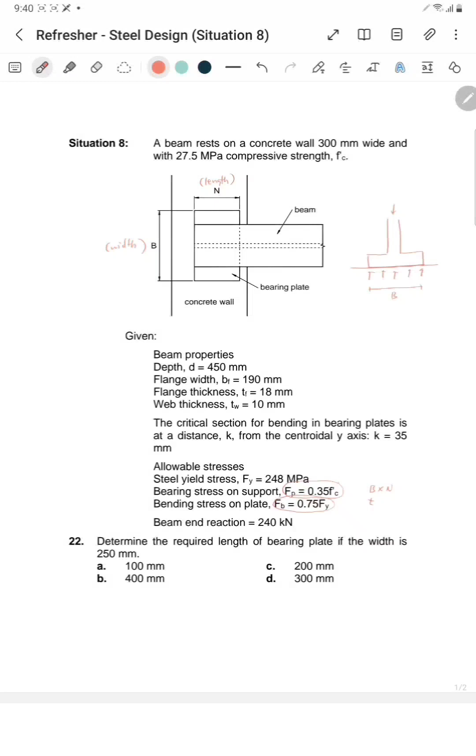First question, number 22: Determine the required length of the bearing plate if the width is 250 mm. Second question, number 23: Using a bearing plate with dimensions 250 mm wide by 200 mm length along the wall, determine the required bearing plate thickness. And for the third question, number 24: determine the web yielding stress which occurs at a distance N plus 2.5K. The bearing plate is 250 wide by 200 long along the wall.

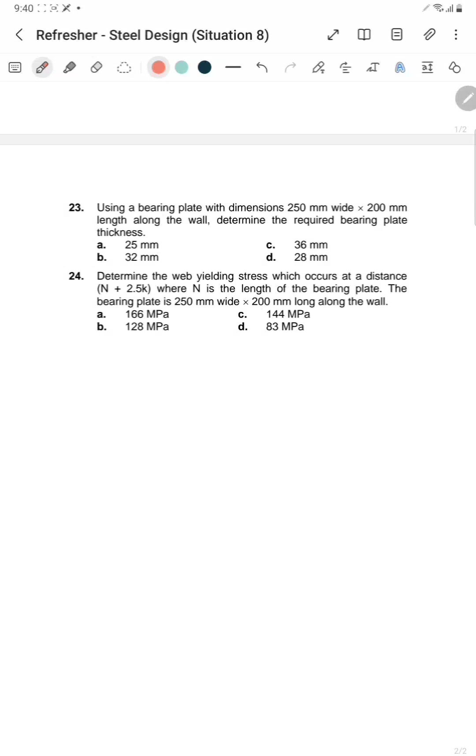For the first question, number 22: determine the required length of the bearing plate. So what's being asked is N, the length of the bearing plate, if the width is 250 mm, so B, the width, is 250 mm. For designing dimension B by N, the basis of the design is the bearing stress, and this bearing stress occurs at the contact area between the bearing plate and the wall, underneath the bearing plate.

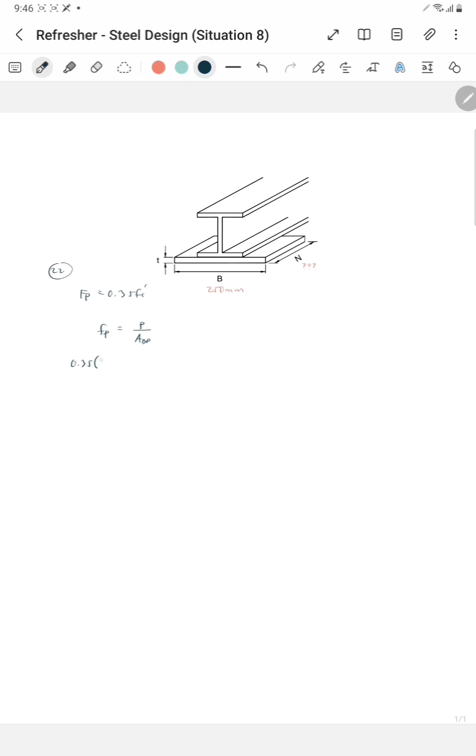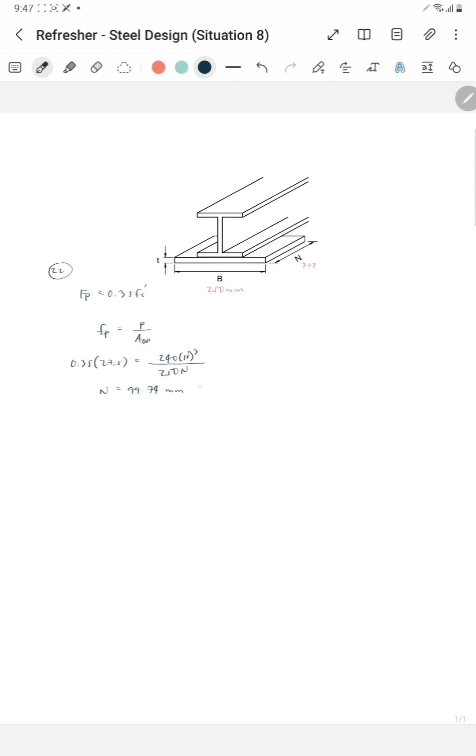Given in the problem, the allowable bearing stress is 0.35 FC prime. The formula: the bearing stress equals the force divided by the area, and this area is the area of the bearing plate. So the stress equals the allowable bearing stress, 0.35 times FC prime, given as 27.5 megapascal, equals the load. The load is given as 240, the beam reaction, divided by the area of the base plate, which equals B by N. So N equals 99.74 mm. The choices show 100, so we take 100, and the answer is letter A.

Next, the second question, number 23: using a bearing plate with dimensions 250 mm wide by 200 mm length along the wall. So it says 250 mm wide, so B is 250.

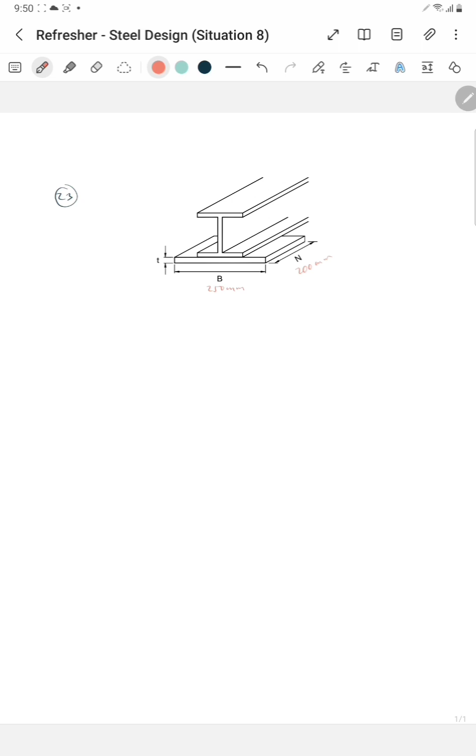And 200 mm length, so N is 200. Sinabi rito na 200 mm length along the wall. Take note na ang tinutukoy na along the wall ay yung direction ng bearing plate. So kung ito yung wall, nilatag yung bearing plate along the wall. So yung N ang magiging along the wall, yung parallel sa wall. At ang tinatanong ay ang thickness.

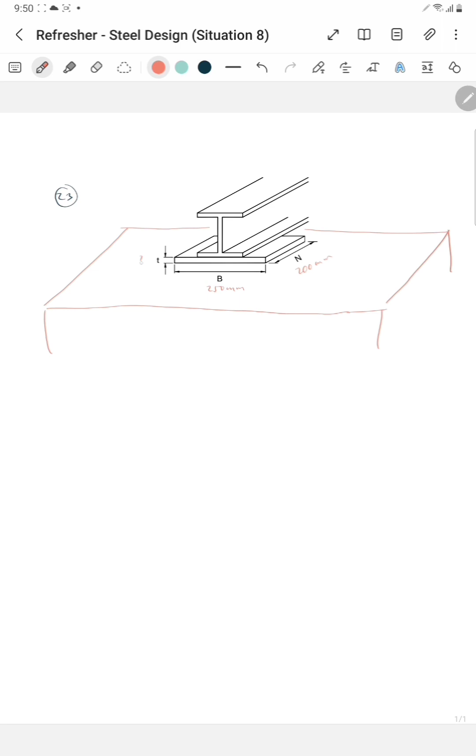Sa pangalawang tanong, ang required ay ang thickness. At sa analysis ng thickness, ang basis ay ang bending. Kumbaga sa footing, yung overhang ay magbe-bend, at meron tayong critical section for bending. Dito sa topic natin, ito yung critical section at ito yung portion na magbe-bend. Yung length ng overhang na subjected sa bending ay N, at yung distance ng critical section mula sa center line ng cross section ay ang distance K.

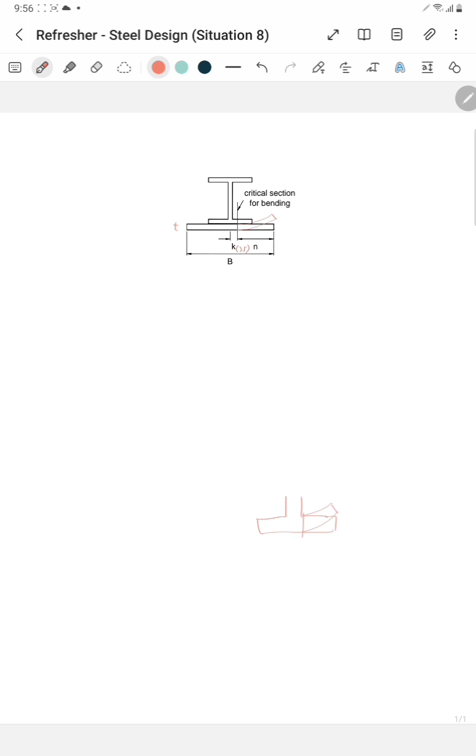Actually given sa problem yung distance K, yan ay property ng I section, at given yung K 35. At ang width ay given 250. Based sa figure, masosolve na natin yung overhang length, yung N, equal to kalahati ni B, bawasan ng K. So B is given 250, over 2, minus K 35. So the overhang length is equal to 90 millimeters.

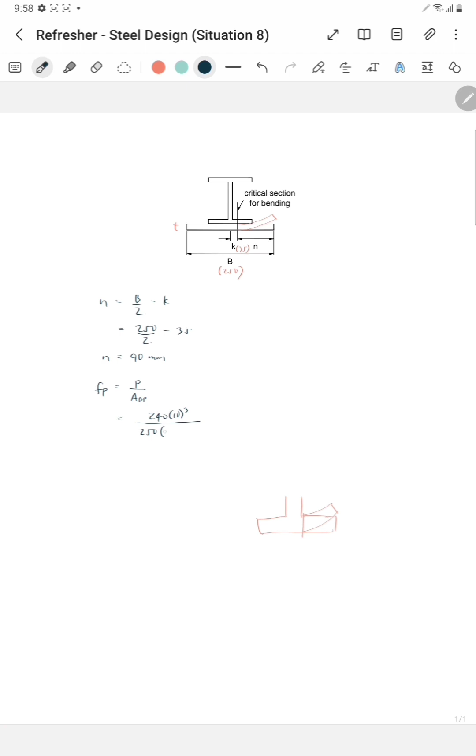Next, solve for the actual bearing stress equal to force over area of the bearing plate. So the force is the load 240, and the area of the bearing plate is given. B is 250, N is 200, so that the actual bearing stress is equal to 4.8

megapascals. Next, to solve for the thickness, we apply this formula: thickness is equal to 2N times the square root of the actual bearing stress divided by Fy. Take note na ang formulang ito ay applicable lang kapag ang allowable bending stress ay 0.75 Fy. Saan galing itong formula at bakit ganito yung limitation niya, 0.75 Fy, ay pag-uusapan natin mamaya. So direct substitute lang naman yung mga data: N is 90, Fp is 4.8, Fy is 248, so that the thickness is equal to 25.04 mm.

So ito yung mga choices para sa thickness. Number 23, letter A 25 mm, letter B 32 mm, letter C 36 mm, and letter D 28 mm.

Theoretically kapag tinatanong ay thickness, dapat siyang i-round up. Kaso pag ni-round up natin, ibig sabihin ang pipiliin natin ay 28. Medyo nakakaduda kasi medyo malaki yung itinalon ng value pag ni-round up. Kung nasa choices sana ay 26, okay sana yun. Kaso ang nasa choices na ni-round up ay 28, kaya medyo magdududa tayo sa 28.

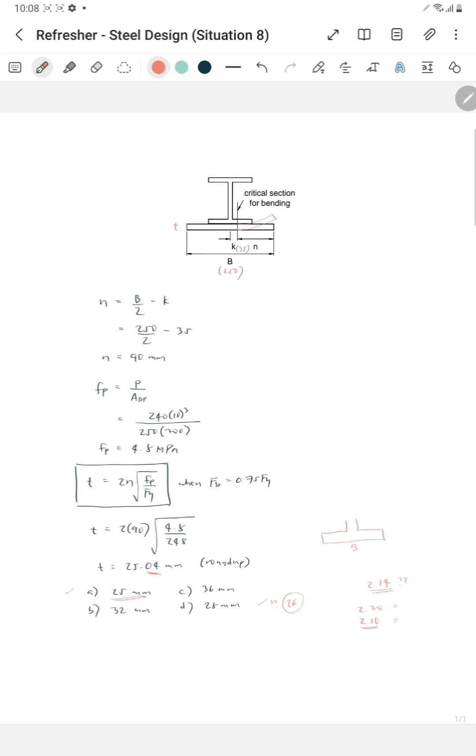Para sa pangatlong tanong, number 24, ang tinatanong ay ang web yielding stress. Given sa problem yung dimension ng bearing plate, B by N, so B is 250 mm and N is 200. At sinabi sa problem na yung web yielding stress ay nag-o-occur at a distance of N plus 2.5K. So ano ba yung web yielding stress at saan ba ito nangyayari?

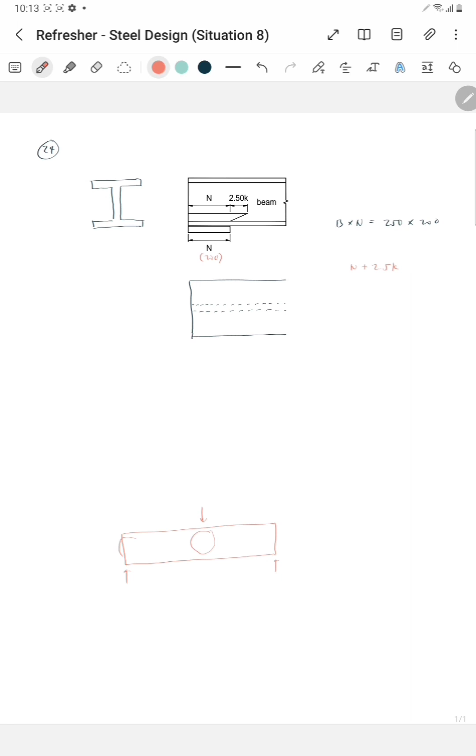Halimbawa merong beam na subjected sa concentrated load, and then syempre merong reactions, concentrated din. Ang web yielding stress ay nangyayari kung saan present yung concentrated force. Dito sa point of application ng load, merong concentrated force, kaya pwedeng dito maganap yung web yielding. At sa support, ang force ay concentrated din, kaya pwede ring mangyari yung web yielding sa support. So kung saan mayroong concentrated force, doon mangyayari yung web yielding. At ang magdadala ng web yielding stress ay ang web.

Ito yung cross section, I section. Dito sa I section, merong sa junction ng flange and web ay merong fillet. At yung distance mula sa dulo ng fillet hanggang sa extreme fiber ng flange, yan yung distance K. Kanina, sinabi natin sa pangalawang tanong na yung K ay magmula sa gitna hanggang sa critical section for bending, pero approximate lang naman yon. Ang totoo talagang K ay ang distance from the toe ng fillet hanggang sa extreme fiber ng flange. So ito yung distance K.

Ito naman yung top view ng beam. Ang sabi, yung web yielding daw ay mangyayari sa distance na N plus 2.5K. So nagkaroon tayo ng pa-slant na stress distribution, dahil ang magdadala ng web yielding ay ang web. Ito yung area ng web na subjected sa web yielding stress, at ang dimensions ay thickness of the web and the length is N plus 2.5K. Meron tayong 2.5K na stress distribution, naka-slant sa horizontal. So the formula for the web yielding stress is the force or the reaction divided by the area of the web, which is equal to TW times N plus 2.5K.

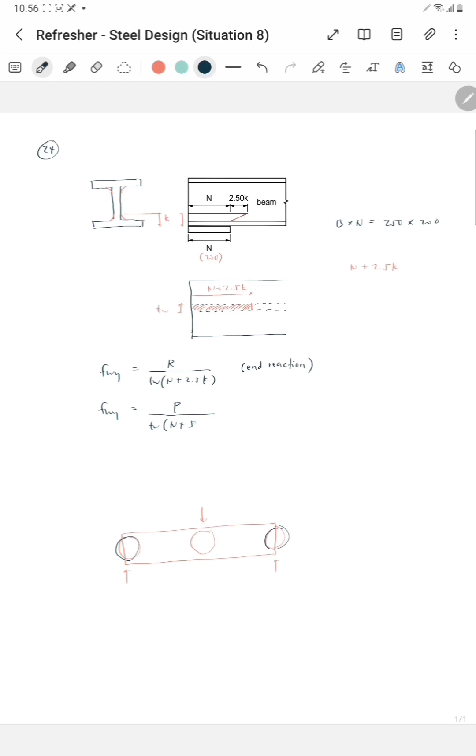Itong formulang ito ay applicable kapag ang ina-analyze natin ay yung web yielding sa end reaction, dahil sa end reaction, so para ito sa support. Then para naman sa web yielding under the concentrated load, ang formula naman, the force P divided by the area of the web, which is equal to the thickness of the web times N plus 5K. Kaya naging 5 kasi under the interior load, meron tayong stress distribution na 2.5K pakaliwa and 2.5K pakanan, so that the total length is N plus 5K. Ito naman yung formula para sa web yielding for the interior load, under the interior load.

Dito sa problem natin, dahil ang involved ay support, ito ngayon yung applicable na formula. So the web yielding stress is equal to the reaction, which is given 240, divided by the thickness of the web is 10, then N is 200 plus 2.5 and K is 35. So the web yielding stress is equal to 83.48 megapascal. At ang nasa choices ay 83, letter D.

Kapag na-over-stress yung web, hindi kakayanin ni web yung concentrated force, so ang mangyayari, pwedeng mag-yield ito. Pag nag-yield, ganito itsura ni web, ganito itsura ni cross-section.

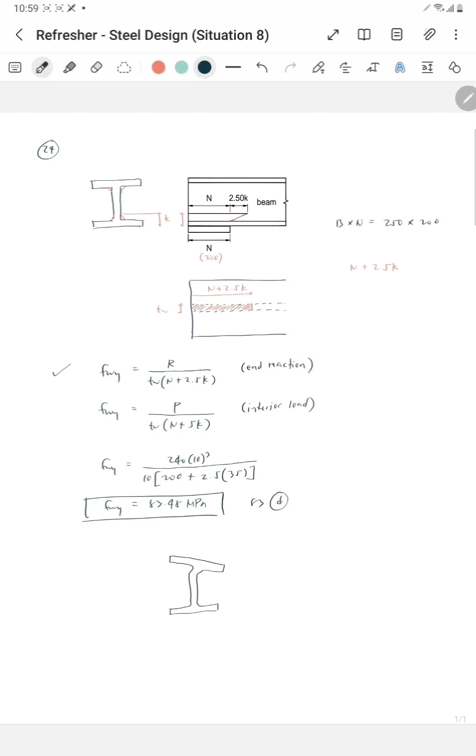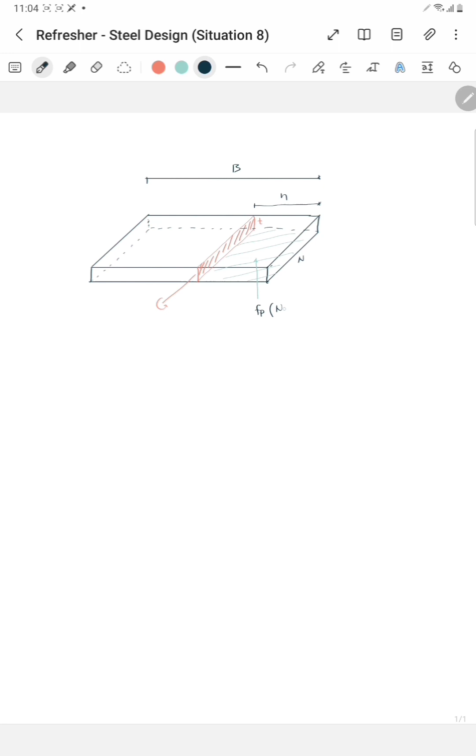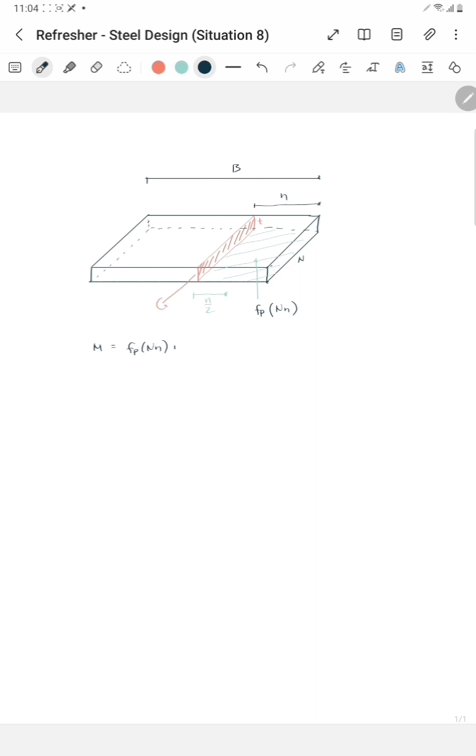Dito sa ilalim, merong bearing stress, merong bearing pressure. At yung bearing pressure, kapag minultiply by yung area ng ilalim, which is big N times small n, magiging force. Syempre yung force na yan ay meron siyang lever arm, at ang lever arm niya ay kalahati ng n, so that the moment sa critical section is equal to the force, which is equal to Fp big N small n times the lever arm n over 2, or simplify, Fp big N small n square over 2. Yan na yung moment sa critical section.

And then bending stress is equal to mc over I. So the bending moment is Fp times big N small n square over 2. And then the distance C is magmula sa axis of rotation hanggang sa top or hanggang sa bottom, and that is kalahati ng thickness. Then over the inertia of the cross section is 1 over 12, the base is N, the height is T, then cube.

Then simplify, the bending stress is equal to, so 12 over 4 is 3, then FP, cancel the big N, then times small n square, then over, cancel one of the t's, so t square. So that t is equal to square root of 3 FP n square over FB, by the way FB is the allowable bending stress.

So this is the formula, let's simplify it further. The thickness is equal to N times square root of 3 FP over FB. So this is the formula for the thickness for any value of the allowable bending stress.

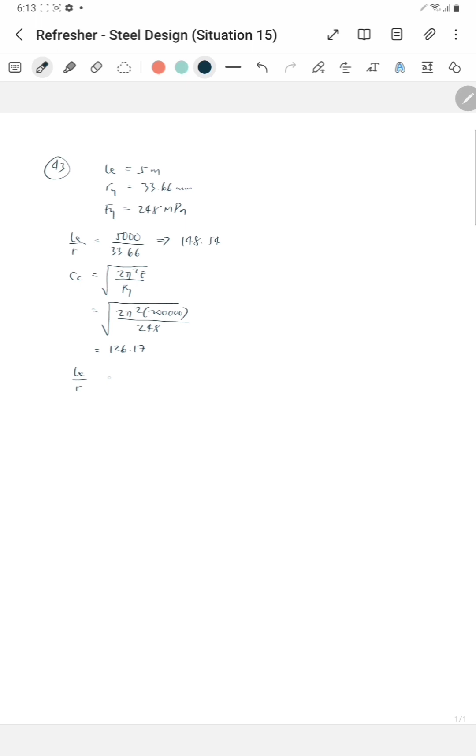Next, solve for CC. The formula is square root of 2 pi square E over Fy. Substitute the data: 2 pi square, elasticity is 200,000 megapascal, divided by Fy 248. So CC is equal to 126.17, and since the slenderness ratio is greater than CC, the column is long.

Then according to the code, when the column is long, the formula for the allowable axial compressive stress is 12 pi square E over 23, then KL over R square. Substitute the data: 12 pi square, E is 200,000, over 23, KL over R is 148.54, then squared. So the allowable axial compressive stress is equal to 46.68 megapascal.

Then axial stress, FA, is equal to the force divided by the area. So since what's being asked is the capacity, then this stress must be the allowable stress. So 46.68 equals the capacity divided by the cross-sectional area, which is given as 4,187. So the actual capacity of the column is equal to 195,449.16 newtons, or equal to 195.45 kilonewtons.

And since the column is long, the mode of failure is buckling. So when it reaches 195, the column will buckle or bend. So it cannot exceed 195. So the load that the column can carry without buckling is only up to 195 kilonewtons. So the answer is letter B.

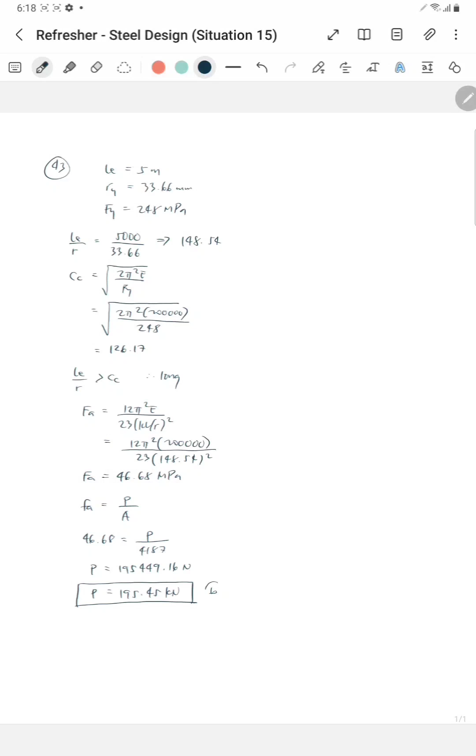For the second question, number 44, the bearing capacity of the pedestal. We need to first know the allowable bearing stress of concrete. So here is the provision: first, on full area of concrete support.

So area 1 is the bearing area, which is actually the area of the base plate. So the bearing area is the contact area between the base plate and the concrete support. And area 2 is the full cross-sectional area of the concrete support.

So when it's stated as on full area of concrete support, then the area of the base plate, area 1, is equal to the area of the concrete support, area 2. So when the size of the concrete support and the base plate are equal, the allowable stress is 0.35 FC prime.

Then sa pangalawang provision naman, on less than the full area of concrete support, ibig sabihin, yung area ng base plate ay mas maliit kumpara sa area ng concrete support, then ito naman yung provision. Merong maximum value of the allowable bearing stress, 0.7 FC prime. So kapag naging greater than 0.7 FC prime, use 0.7 FC prime.

So sa problem natin, given yung size ng base plate at ng pedestal, pareho nga raw sila na 400 by 400. So since equal yung area ng base plate and ng concrete support, then ang applicable na provision for the allowable bearing stress is 0.35 FC prime.

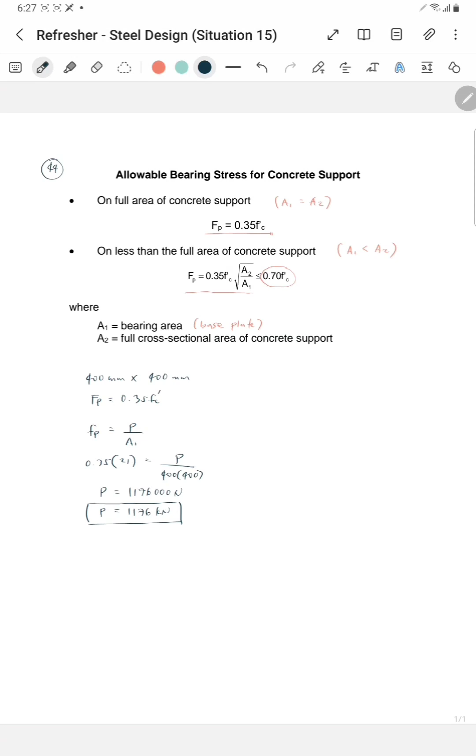Then given yung allowable bearing stress, 0.35, FC prime is 21, then equals the actual capacity of the bearing plate, bearing capacity ng pedestal, then divide by the area 400 by 400, so that P is equal to 1,176,000 newtons, or equal to 1,176 kilonewtons. So kapag na-reach itong capacity na to, then si concrete pedestal ay magfe-fail sa bearing, meaning madudurog yung concrete support.

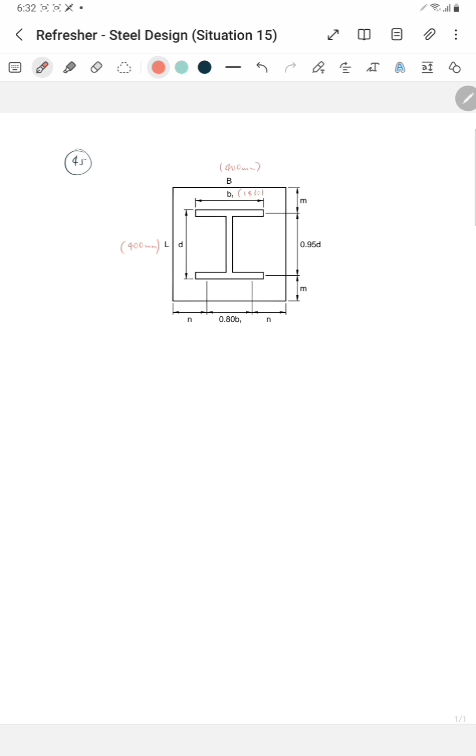Pangatlong tanong, number 45, the minimum required thickness of the base plate. So given sa problem yung size ng base plate, 400 by 400, so B is 400, L is 400. Given din yung measurements ng I-section, BF is 146.1 mm, depth is 258.3 mm.

Para sa column base plates, ang bending is two-way. So base sa figure, dalawa yung directions ng bending. Merong bending along the dimension B, so yung cantilever length is N, ito yung critical section, magbe-bend ito pataas. And then sa kabilang direction along L, meron ding bending, ito yung critical section, at yung cantilever length M, so siya yung magbe-bend.

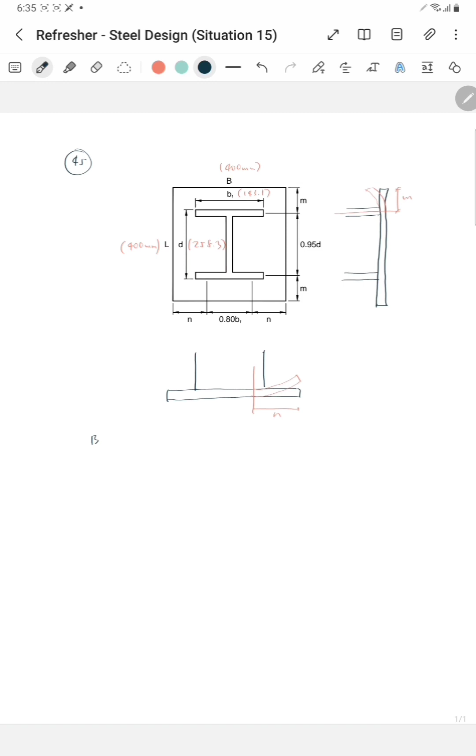The next, isolve natin yung mga cantilever lengths. Based from the figure, very obvious na B is equal to 0.8 BF. Tandaan nyo yung 0.8 BF at saka yung 0.95 D, yan yung locations ng critical sections for bending. So B is equal to 0.8 BF then plus 2N. Substitute the data: B is 400, BF is 146.1, then plus 2N, so N is equal to 141.56 mm.

Then obvious din from the figure na L is equal to 0.95 D plus 2M. L is given 400, D is 258.3, then plus 2M, so M is equal to 77.3075 mm. At ang pipiliin natin sa dalawa is the longer overhang, so ang mag-govern is yung 141. Mas critical kung mas mahaba yung cantilever length.

The next, solve for the actual bearing stress equal to force over area. Para sa force, dalawa yung pinagpipilian natin. Yung isa is galing sa unang tanong, capacity of column is 195.45, at yung pangalawa naman galing sa pangalawang tanong, the capacity of the concrete pedestal P is 1176. So sino sa kanilang dalawa ang gagamitin sa pag-compute ng thickness? Since hindi pwedeng lumagpas sa 195 at hindi rin pwedeng lumagpas sa 1176 yung actual load, ang mag-govern is obviously the smaller value, yun ang gagamitin natin sa computation ng thickness.

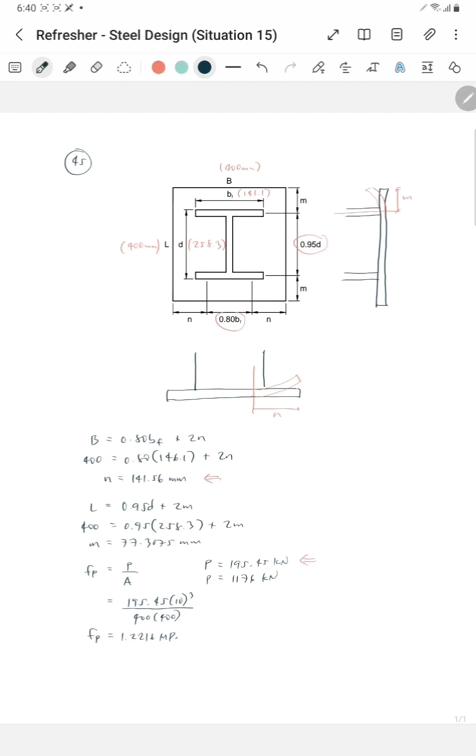Then formula for thickness, 2 times M or N, whichever governs, then times the square root of FP over Fy. Na-derive natin ito using FB equal to 0.75 Fy. Kung walang sinabi regarding the allowable bending stress, automatic yon, we use 0.75 Fy. Since M or N, ang nag-govern is N, which is the longer overhang, we use 141.56, then times the square root of FP is 1.2216 divided by Fy, 248 megapascals. So the thickness is equal to 19.87 mm, say round up 20 mm.

So ang sagot is 20 mm, letter B.

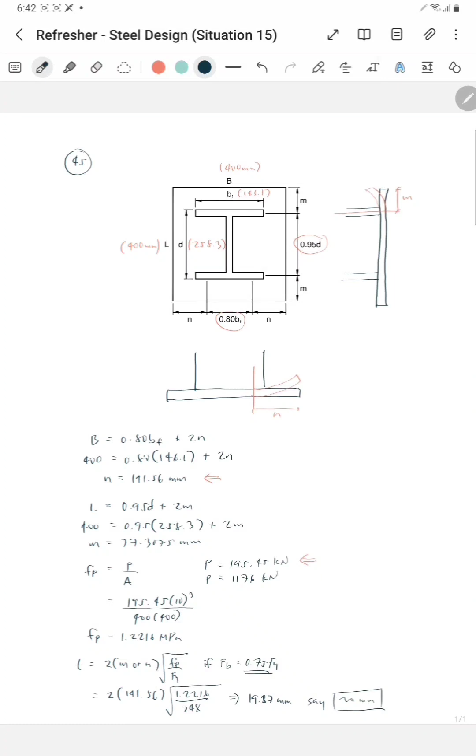Next problem, situation 25. Itong problem na to ay past board at maraming beses nang lumabas ito sa board exam. So ang nangyari, meron tayong column at sa column ay may nakakabit na bracket, at ang cross section ng bracket is angle. And then sa bracket ay may nakapatong na beam.

So given yung size ng bracket, 75 by 75, yun yung size ng legs ng angle. And then by 15, yun naman yung thickness ng angle, 15, is 200 millimeters long. So yung length ng angle is 200 mm, ito siya, 200 mm.

It is connected to the 16 millimeter thick flange of the column support. So the thickness of the column flange is 16 with 2 bolts of 16 mm diameter. So the size of the bolts is 16 mm.

The bracket is subjected to a load of 42 kilonewtons from beam A. So there's a load of 42 kilonewtons coming from the beam.

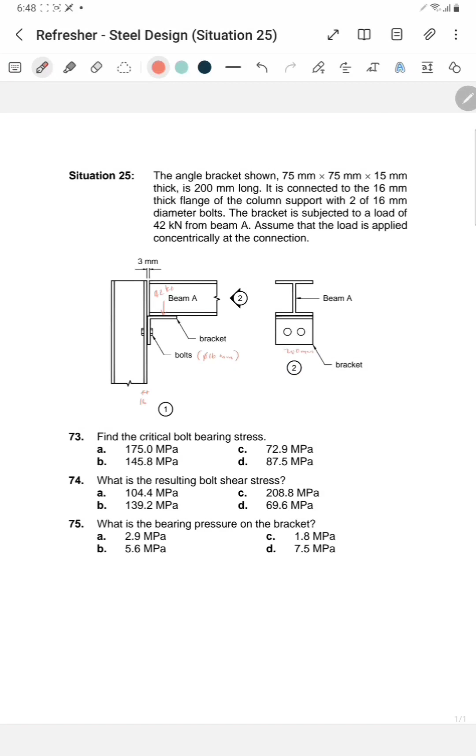First question, number 73: what is the critical bolt bearing stress? So it's asking for the critical bolt bearing stress.

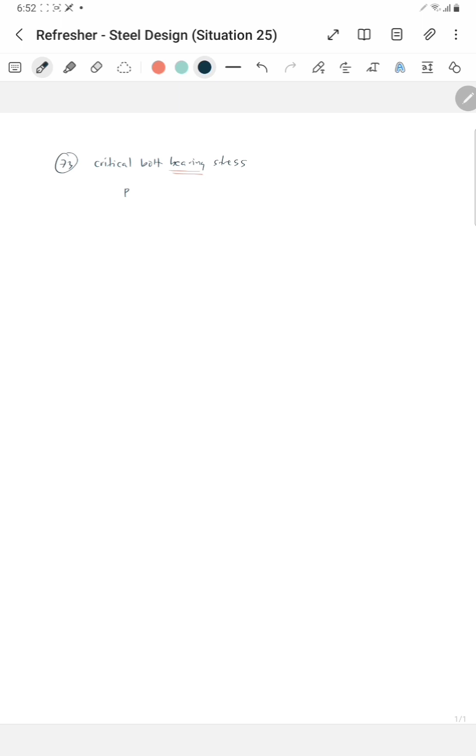Take note, for bearing, the relationship between force and area is that they are perpendicular. So the area is perpendicular to the force. If our load P is downward, which is vertical, then the area must be horizontal. So we can see the bearing area when we look at the connection from a top view.

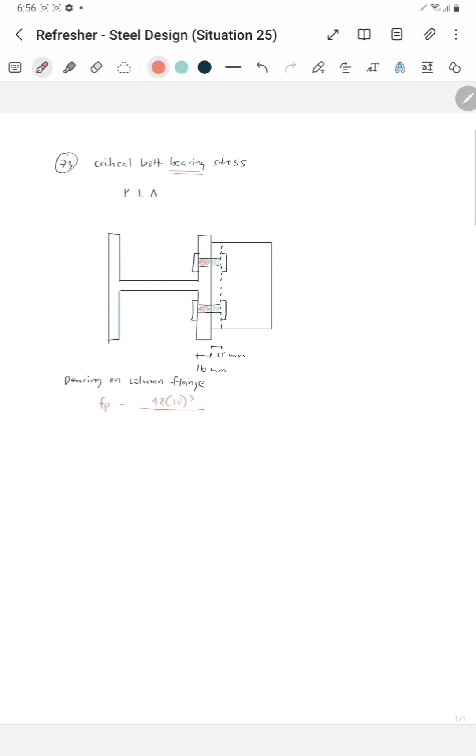So the bearing stress is equal to the load P, which is 42 times 1,000 to convert to newtons, then divide by the contact area between the bolt and the column flange. That's the orange colored area. The dimension is 16 millimeters thick flange by 16 mm diameter bolt, and since there are two orange areas, we multiply by 2.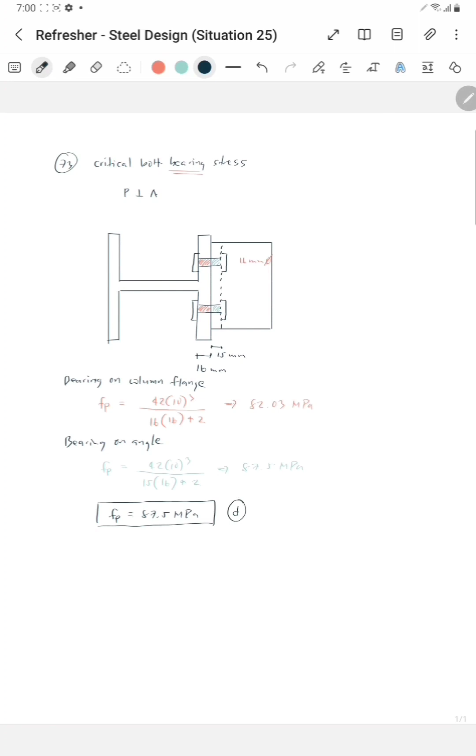Okay, second question, number 74, the bolt shear stress. Okay, for shear property, we already know that the load is parallel to the shear area. So in our problem, if the load is vertical, then the shear area is vertical. So actually the shear area of the bolt is this one, this cross section. And the shape of the cross section is circular.

So the shear stress is equal to the force over the shear area. The force is 42,000 newtons, then divide by the cross-sectional area of the bolts, pi over 4 times 16 millimeter diameter squared, times 1. So times 1 because the bolt is under single shear, and since there are two bolts, there's a multiplier of 2.

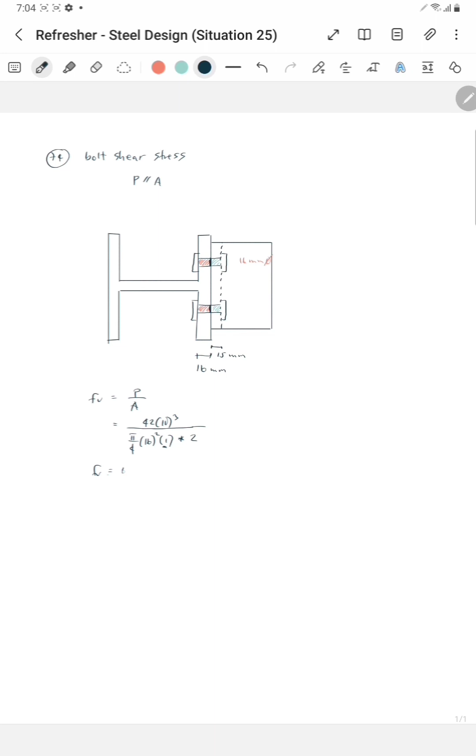So the shear stress is equal to 104.45 megapascals. And the answer is letter A.

Third question, number 75: what is the bearing pressure on the bracket? So it's asking for the bearing pressure on the bracket.

Okay, here's the bracket, and this shaded area is the bearing area. Since the dimension of the leg of the angle is 75, with a gap of 3 mm, this becomes 72 mm. And the length of the bracket is 200 mm. So this is the 200 mm, and there's a load of 42 kilonewtons.

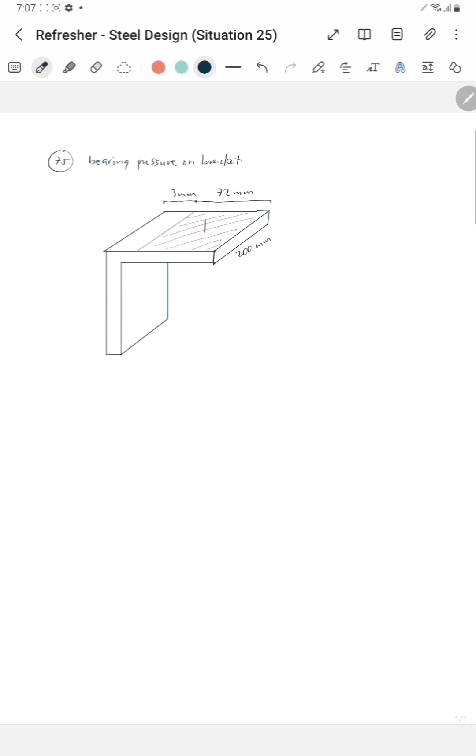So for bearing, the force is perpendicular to the area. Since the load is vertical, the bearing area is horizontal. So the bearing stress is equal to the force over the area. The force is 42,000 newtons divided by the contact area, equal to 72 by 200. So the bearing pressure on the bracket is equal to

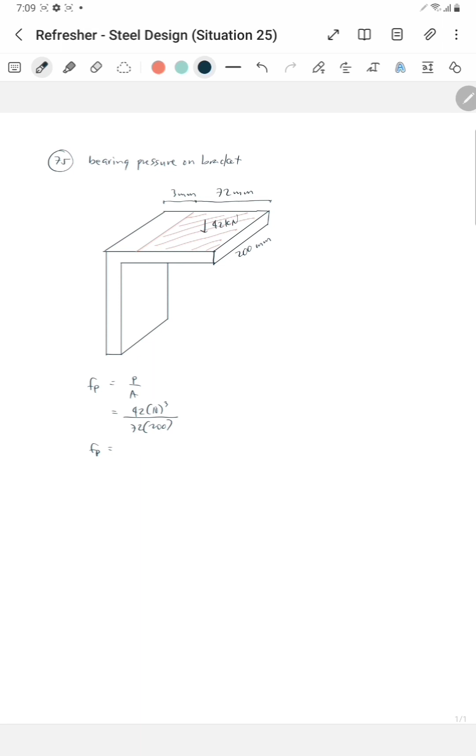2.92 megapascals, and the answer is letter A.

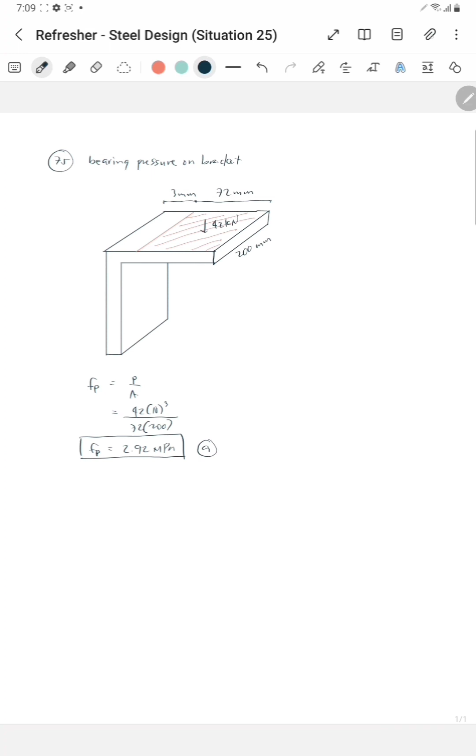Okay, ito yung nangyari na. So ang dimension ng angle ay 75, tapos yung contact dimension is 72 kasi merong 3 millimeters na gap. So yung 72 na yon, kalahati is 36. So yun yung location ng load. So 36 plus the gap 3, therefore distance ni load from the column flange is 39 mm.

Then walang binigay na location ng bolt, so sabihin na lang natin na kunwari kalahati. So kung 75 ito, then kalahati at 37.5. So additional data na lang ito, dinagdag na lang natin.

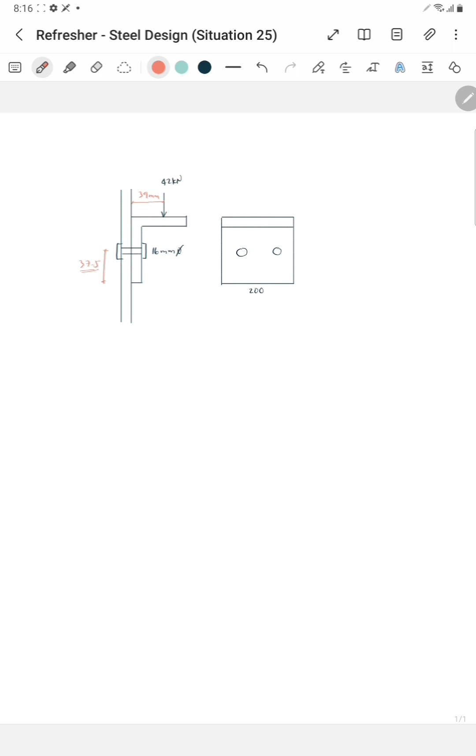So dahil sa load na 42 kilonewtons, ang mangyayari kay angle, magbe-bend ito. So ito magiging itsura pag nag-bend. Obviously, yung bolt is under tension. Tapos merong portion dito na under compression. So hindi man tinatanong pero sasagutin na rin natin ano yung tensile stress sa bolt and ano yung compressive stress doon sa contact area between the column flange and the angle.

Okay, say ito yung neutral axis. And distance niya from bottom is unknown, so tawagin natin x. And distance from the bolt is 37.5 minus x. So yung bolt yung under tension, at ito namang contact area na ito yung under compression. So kailangan isolve na muna natin yung x.

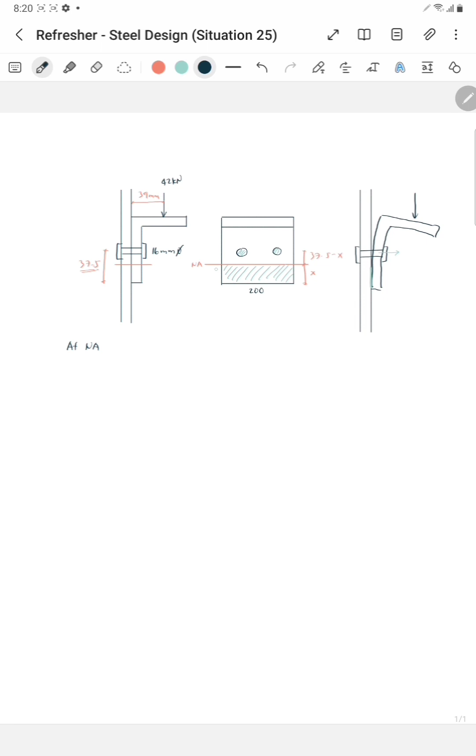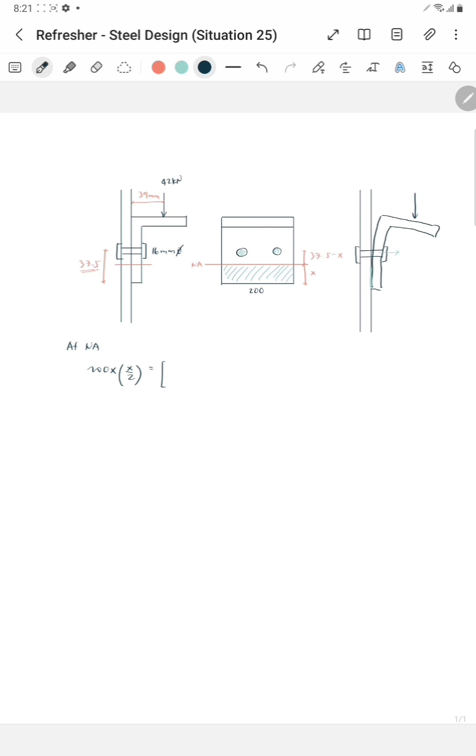So to solve for x, we apply statical moment of area at the neutral axis. Ang analysis dito, ang proseso rito ay similar sa WSD sa RCD. So at the neutral axis, the statical moment of area of the compressive part, the area compression is 200x and the lever arm is x over 2. So yan yung statical moment of area ng compressive area about the neutral axis, and then equal yan sa statical moment of area ng area under tension. Bali ang area under tension ay bolts.

So the area pi over 4, 16 square, dalawa sila, and distance from the neutral axis is 37.5 minus x. So that x is equal to 10.4328142 millimeters.

The next, solve for the moment of inertia about the neutral axis. Para sa compressive area, bali rectangular, at tayo ay kukuha ng inertia about its base, about the neutral axis. So yung neutral axis will be the base ng rectangle. So the inertia of rectangle about the base is 1/3, then 200, and then x cube, then plus, para sa bolts, ang inertia is area distance square.

So the area is pi over 4, 16 square times 2, and the distance is 37.5 minus x, and then square. So the moment of inertia is equal to 370,312.0397 millimeter raised to 4.

Then next, solve for the moment. Tayo ay magmo-moment sa face of support. So the moment is equal to the load, the force 42 times the lever arm 39 millimeters or 0.039 meters. So the moment is equal to 1.638 kilonewton meter.

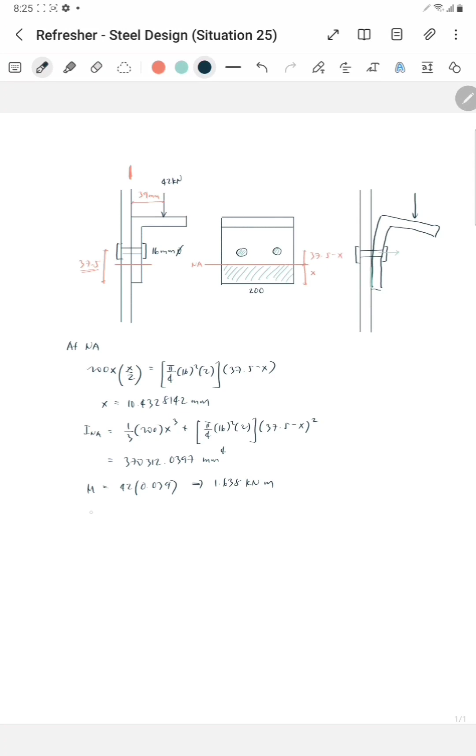Then to solve for the stresses, we apply MC over I. Yung tensile stress sa bolts and compressive stress dito sa contact area is masosolve using flexure formula MC over I, kasi ang nag-cause ng stress is the moment or the bending. So flexure formula, the bending stress equals MC over I. Para sa bolt which is under tension, the tensile stress is equal to the moment 1.638 times 1 million para maging Newton millimeter ang unit.

And then the distance C is the distance of the bolt from the neutral axis, and that is 37.5 minus x, and then divide by the moment of inertia, 370,312.03. So the tensile stress is equal to 119.73 megapascals.

So para sa compressive stress, the moment is 1.638. Ang compressive stress is maximum sa extreme fiber, so dito sa ilalim yung maximum compressive stress. So that the distance from the neutral axis is x, then divide by the moment of inertia, 370,312. So the compressive stress is equal to 46.15 megapascals.

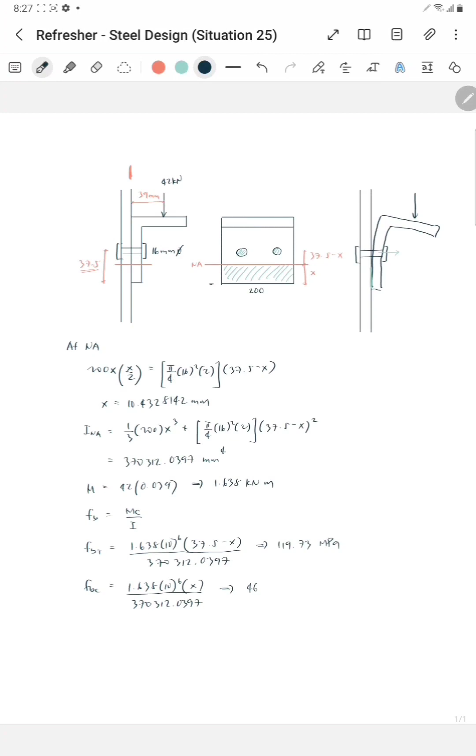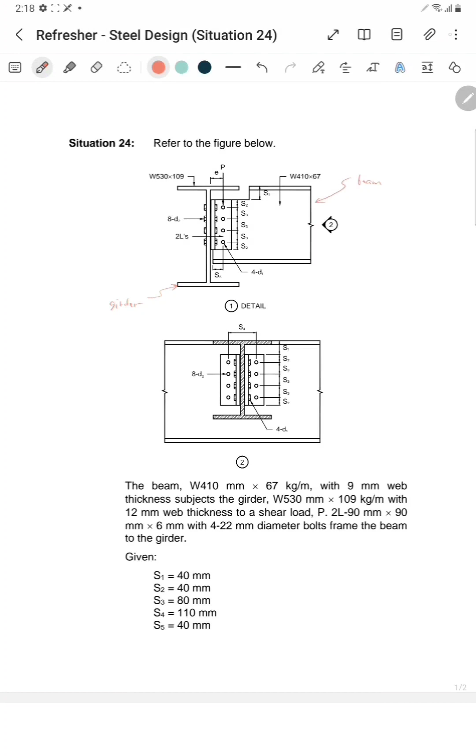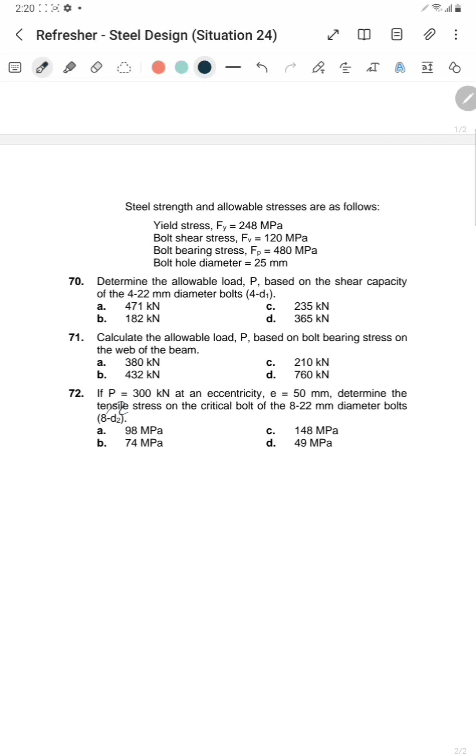So ito yung mga tinatanong. Number 70, the load P based on the shear capacity of 4D1. Number 71, the load P based on the bearing capacity of the beam web. And number 72, tinatanong is the tensile stress on the critical bolt.

So para sa unang tanong, number 70, find the load P based on the shear capacity of the 22mm diameter bolts, 4D1. So ito yung i-analyze natin, itong bolts na ito, 4 sila, 4 na D1. Pwedeng siya double shear, or pwede ring single shear, depende yan sa ina-analyze.

Merong part itong bolt na nakabaon sa beam web, at itong part na ito is under double shear. So kapag ina-analyze yung bolt na nakabaon sa beam web, ang analysis ay double shear. Then itong part naman na ito ay nakabaon sa beam angle, kapag ito naman ang inanalyze, siya ay single shear. So ang pagiging single or double shear ay depende yon sa ina-analyze na segment ng bolt.

So dito muna tayo sa shear on beam web. I-analyze natin yung bolt na nakabaon sa beam web. Ang bolt na nakabaon sa beam web is under double shear.

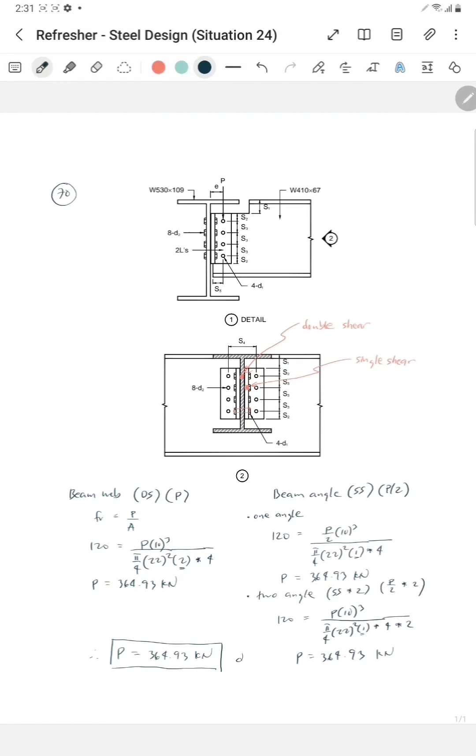Okay, hindi man tinatanong pero sagutin na rin natin. Find the shear stress on 8D2. Kanina ang sinagot natin shear stress on the bolt D1, so ngayon naman shear stress on the bolt D2. Ito yung bolt D2.

Mayroong portion na nakabaon sa girder web, at meron din namang portion na nakabaon sa girder angle. Itong portion na nakabaon sa girder web is under single shear, at ito namang portion na nakabaon din sa girder angle is also under single shear.

Okay, para muna sa girder web, dalawang sides yung bolt na nakabaon sa girder web. Ito yung isang side at ito yung ikalawang side. Pwede nating i-analyze one side or pwede rin namang i-analyze two sides. Ang load sa isang side is kalahati, P over 2, and yung bolt is under single shear. So load is P over 2. Ang allowable shear stress 120 equals the load P over 2.

Kung ang i-analyze ay isang angle, the load is P over 2, then divide by the area. Pi over 4, diameter is 22 - actually sa pangatlong tanong binigay yung diameter dito, 22. And then times 1 kasi single shear, and then times 4 kasi 4 yung bolts na nakabaon sa isang angle. So that the capacity is equal to 364.93 kilonewtons.

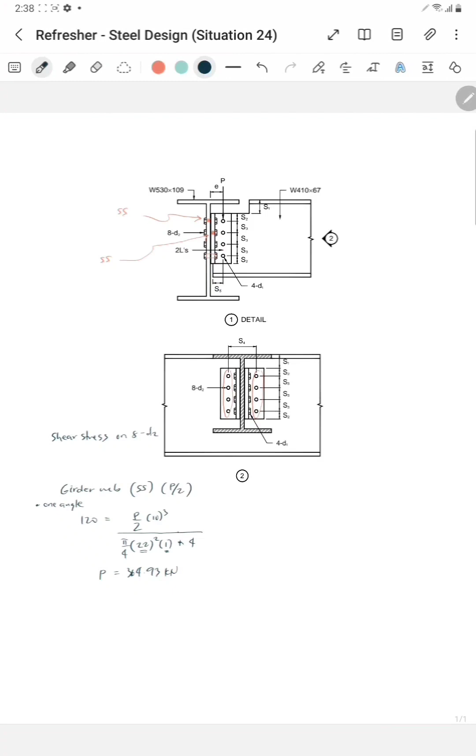Kapag naman ang ina-analyze natin ay dalawang angles, itong load na to, P over 2, ita-times natin ng 2 kasi dalawang sides. At yung denominator, mayroon ding multiplier na 2 kasi dalawang sides. Ang magiging sagot, kung sakaling ina-analyze 2 angles, ay same, 364 kilonewtons.

Then dito naman tayo sa shear para sa bolt segment na nakabaon sa girder angle.

So ito yun ha. Ito yung bolt na nakabaon sa girder angle. Ang load, bali single shear, at ang load ay sa isang angle, sa isang side, P over 2. So analyze one angle.

The allowable shear stress 120 equals the load P over 2, then divide by the area pi over 4, 22 square times 1 kasi single shear, times 4 kasi apat yung bolt sa isang side, sa isang angle. At ang sagot ay 364.93 kilonewtons. So kung dalawang angles ang inanalyze, yung numerator ay may multiplier na 2 at yung denominator meron ding multiplier na 2 at ang sagot the same.

Okay, so kung ang tinatanong ay shear capacity, so load P based on shear, then dalawa ang pagpipilian, actually apat na. Yung dalawa ay manggagaling sa shear ng 4 na D1 at yung dalawa pa ay manggagaling sa capacity naman ng 8 D2. Itong 4 na D1 na to ay merong portion na nakabaon sa beam web at meron ding portion na nakabaon sa beam angle.

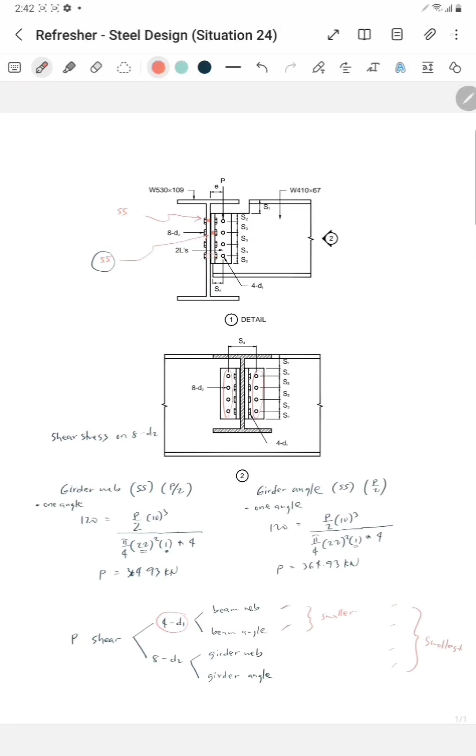Pangalawang tanong, number 71. Solve for P based on bolt bearing stress on the web of the beam. Gamitan ng konting imahinasyon, actually, para sa bearing, apat yung possible answers. Pero isa lang ang sasagutin natin kasi nga ang tanong sa exam is the bearing on the web of the beam.

So sa bearing, ang relationship ng load and area, perpendicular sila. Kung ang load ay vertical, then ang bearing area is horizontal. Para makita natin yung horizontal area for bearing, then yung figure, tignan natin ang top view. Okay, so ito yung top view, then ito yung girder web, ito naman yung beam web. Ang tinatanong is the capacity P based on the bolt bearing stress on the web of the beam. So ito yung area. Andyan yung bearing stress on the web of the beam.

Okay, para sa bearing stress on the beam web, so the bearing stress is equal to the force over area. Para sa beam web, we use the load P. Then the bearing stress is given, 480 equals the load. Kung si P ay nakakilonewton, so times 1,000 ito para newtons, then divide by the bearing area. Given yung diameter D1, 22 mm, given yung thickness ng beam web, 9 mm, so therefore the bearing area is the diameter of the bolt times the thickness of the beam web.

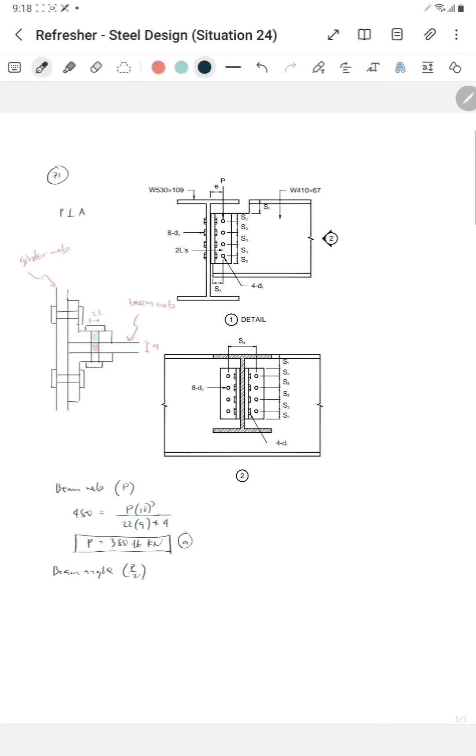Para detalyado yung computations, so sagutin na rin natin kahit hindi tinatanong. Dito tayo sa beam angle. Sagutin natin P based on the bearing on beam angle. Kapag inanalyze yung isang angle, then ang load dito is kalahati lang, so P over 2. So the bearing stress is 480 equals the load P over 2.

Then divide by the area, so 22 times the thickness of the angle. Given yung thickness ng angle 6 mm. So 6, and then 4 yung bolts na nakabaon sa beam angle. Ang inanalyze natin dito bale isang angle. So ang sagot is 506.88 kilonewtons.

Okay, kung sakali naman ang inanalyze natin ay dalawang angles, so ito yon, dalawa yung areas bale. Ang mangyayari dyan sa computation, yung load ay magiging P over 2 times 2, at yung number of bolts naman, syempre dahil dalawang sides, times 2, at ang result ay the same.

Okay, para naman sa bearing on the girder web, so ito yun. May options tayo, pwede natin i-analyze yung isa lang or pwedeng i-analyze yung dalawa. Bearing on the girder web, so the bearing stress 480 equals the load. Kung isa yung in-analyze, isang side, the load is P over 2.

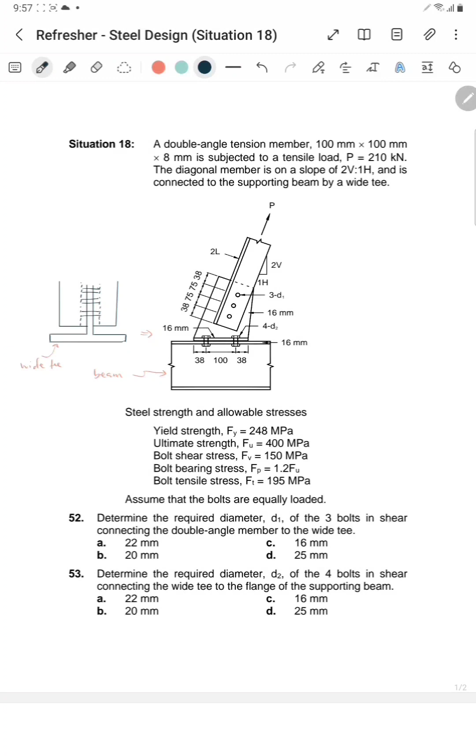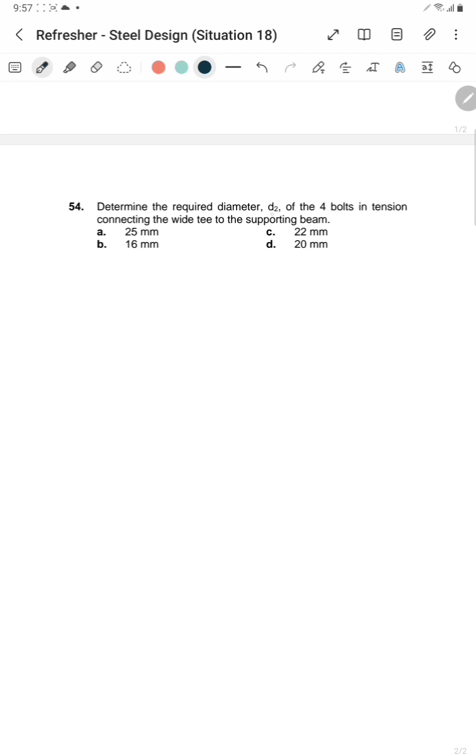So ang mga tinatanong, una, number 52, the diameter D1 based on shear. Pangalawang tanong, number 53, the diameter D2 based on shear. At pangatlong tanong, number 54, diameter D2 based on tension.

Sa problem, given yung load P, 210, at ang nagdadala ng load na ito ay yung dalawang angles. Unang tanong, number 52, is solved for D1 based on shear. Yung D1 ay nakabaon siya sa dalawang angles at sa wide tee. So i-drawing natin yung cross section ng dalawang angles at yung web ng wide tee.

Yung bolts natin ay tatlong D1. Merong part ng bolt na nakabaon sa tee, at meron ding part ng bolt na nakabaon sa angle. So i-analyze natin pareho.

Para sa bolt na nakabaon sa wide tee, ito yung nasa gitna, ang load is P. Yung bolt na nakabaon sa tee is double shear. Given yung bolt shear stress 150, equals the load P which is 210, divide by the area of the bolt, pi over 4 D1 squared, times 2 kasi double shear, times 3 kasi tatlo yung bolts na nakabaon sa gitna. So that the diameter D1 is equal to 17.24 millimeters.

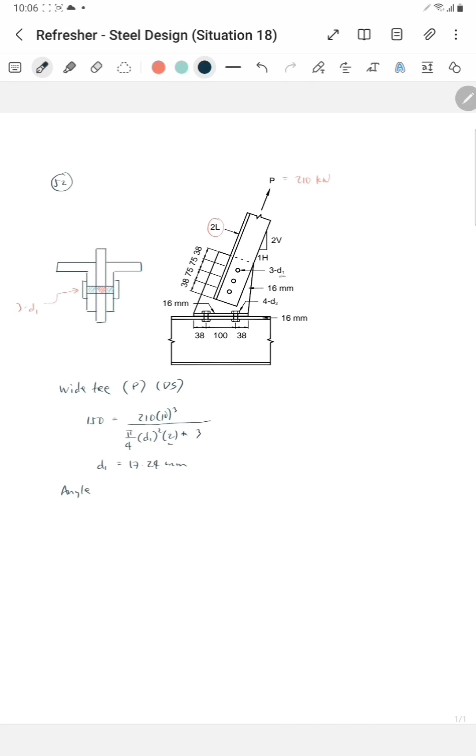Okay, next, para naman sa bolt segment na nakabaon sa angle, kapag inanalyze yung isang side, isang angle, ang load ay kalahati at yung bolt na nakabaon sa isang angle is under single shear. So the allowable shear stress is 150 equals the load. Kung isang angle ang ina-analyze, ang load is P over 2, so 210 over 2, and the area is pi over 4 D1 squared times 1 kasi single shear, then times 3 kasi tatlo yung bolts na nakabaon sa isang angle. So that the diameter D1 is equal to 17.24 mm. Kapag dalawang angles ang inanalyze, ang load ay magiging times 2 at ang denominator ay magiging times 2, so ang result the same.

So dalawang naging analysis for shear, una ay sa wide tee and pangalawa sa angle. At ang pipiliin natin sa dalawang sagot is the larger value. Nagkataon lang na pareho yung diameters, kung sakaling magkaiba yan, ang pipiliin is the larger value, so 17.24. Walang 18 sa choices, so ang pipiliin natin ay 20 mm, round up. Bakit hindi 18? Kasi kung pag-uusapan ay commercial size, wala namang 18 mm na commercial size. Ang mga nasa choices dito ay mga commercial sizes, so we choose 20. Wag tayong magtaka kung malaki ang itinalon from 17.24 naging 20 kasi nga commercial size.

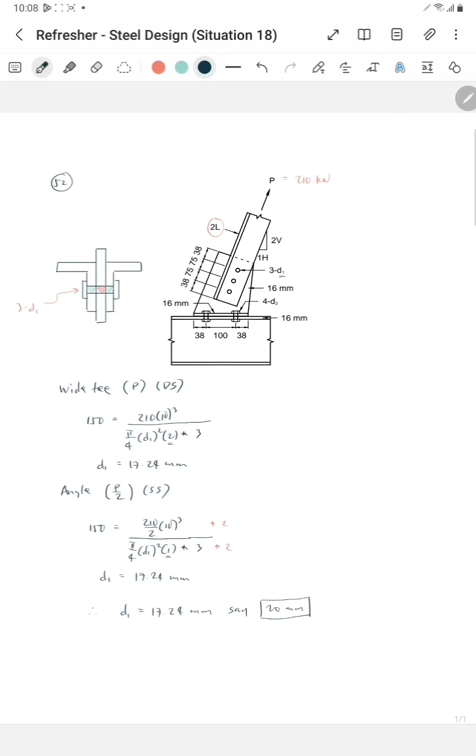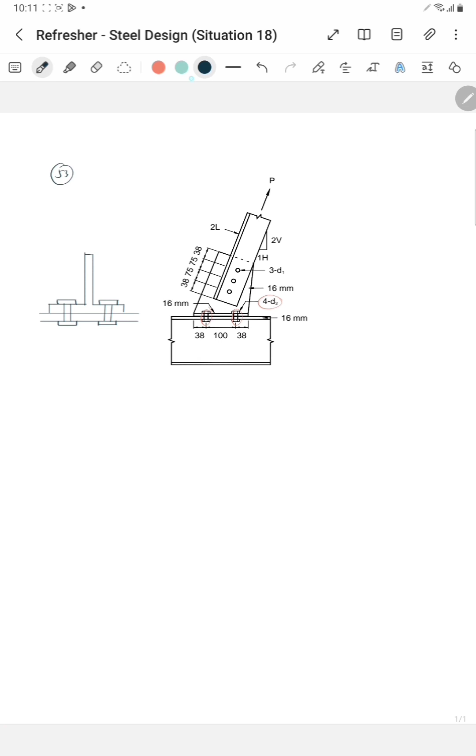Okay, pangalawang tanong, number 53. Solve for the diameter D2 based on shear. Ito yung D2, apat sila. Ito yung side view ng wide tee at ito na nga yung apat na D2. Take note kapag shear, ang load is parallel to the area. And since the area is horizontal, dapat yung load ay horizontal.

Pythagorean theorem, 1 horizontal, 2 vertical, so the slant is square root of 5. Yung component ng load na gagamitin natin is the horizontal component, equal to P times 1 over square root of 5.

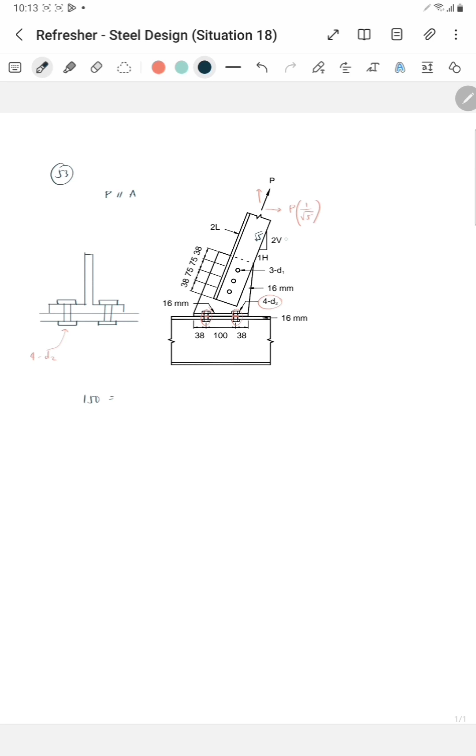So the shear stress is equal to the force over the area. Given yung bolt shear stress 150, equals the force which is the horizontal component. P is 210, times 1 over square root of 5, times 1000 para maging newtons, divide by the area of the bolt D2, pi over 4 D2 squared, times 1 kasi single shear, then times 4 kasi apat sila. So that D2 is equal to 14.12 mm. Based from the choices, we choose 16, letter C.

Pangatlong tanong, number 54. Solve for the diameter D2 based on tension. Property, kapag tension, yung force is perpendicular to the area. Yung bolt dito ay under tension. Ito ngayon yung area which is horizontal, so therefore ang force must be vertical. Bali ang gagamitin natin is the vertical component of the load P, which is P times 2 over square root of 5.

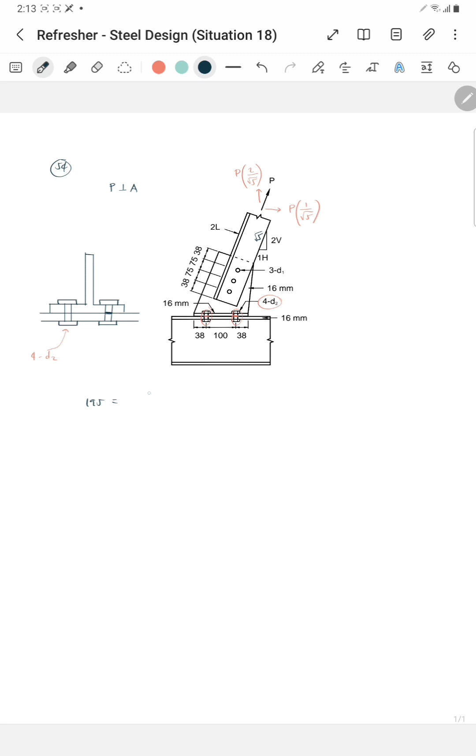Formula, tensile stress is equal to the force over the area. Given yung bolt tensile stress 195, equals the force. P is 210 times 2 over square root of 5 para maging vertical component, divide by the area, pi over 4 D2 squared, times 4 kasi apat sila. So that diameter D2 is equal to 17.51 millimeters. Round up tayo, based from the choices, we choose 20 mm. Ang sagot is letter D.